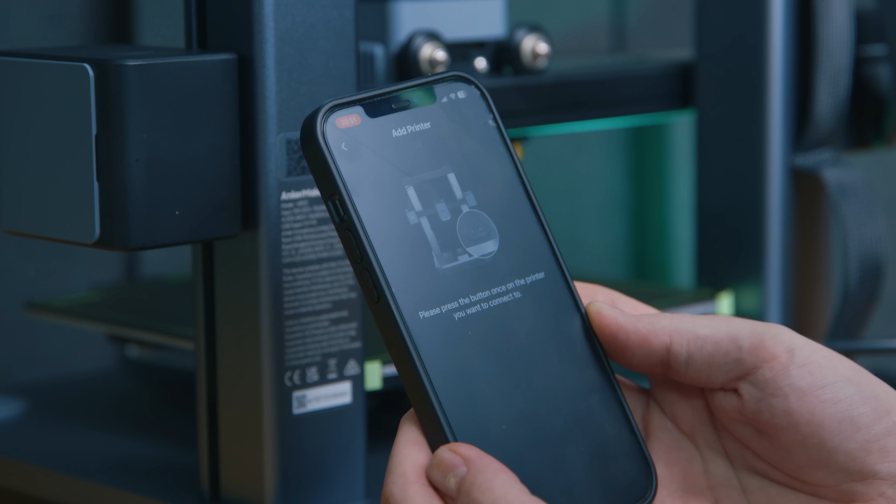This is a neat and tidy application with all the functions and options where you'd intuitively expect them to be. You easily connect your printer to a phone using no more than the QR code on the printer, and once you create an AnkerMake account, this will connect the printer to that account and your local Wi-Fi.

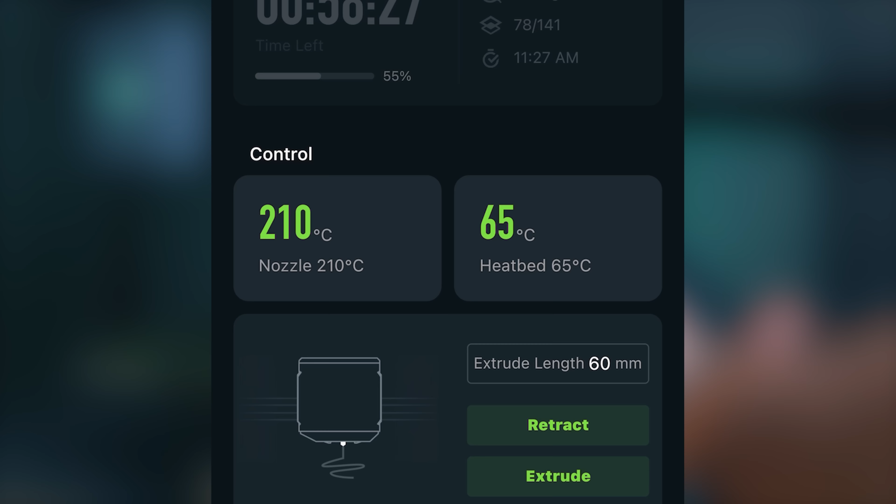All of the controls that were on the screen of the M5 are now in the phone app, and you'll still have full access to all of the functions. It's kind of like the original Google Chromecast approach. You don't need much in the way of external controls when you already have a device in your hand with a screen that can do it already.

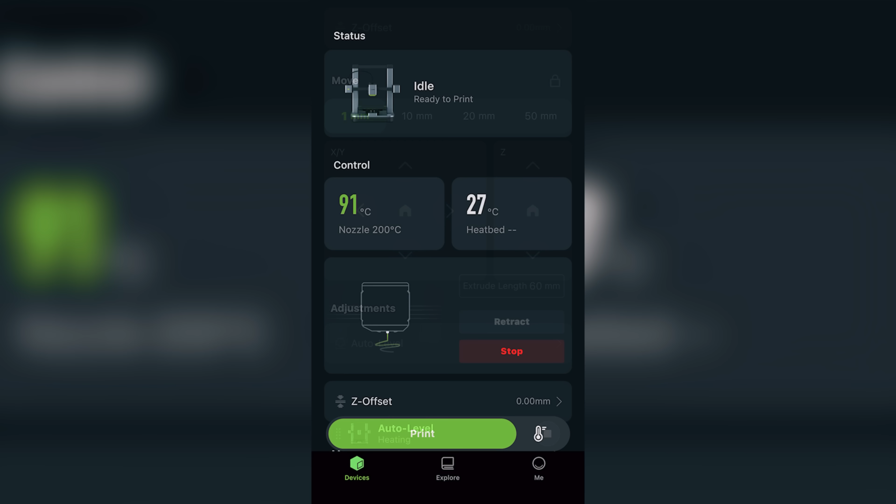All of the functions like bed leveling, moving the plate or the Z-arm are all done in here. Preheating is done here, and there's a selection of prints you can run from here too.

But for proper prints, the real work is done in the desktop app, the AnkerMake Slicer, which is essentially a re-engineered version of Cura. But unlike other OEM branded versions of this application where the style's been changed, this version has been refined to show you only what you need in order to get the printer working.

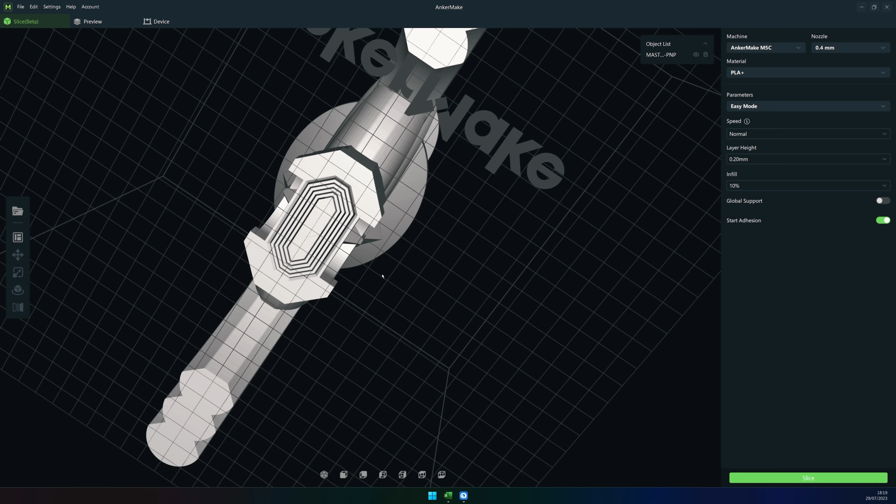As soon as you log in, you'll find your printer is already there along with its settings since you added this to your account in the phone app.

From here, it's just a simple case of dragging a model into the view window, and your settings at the outset are as simple as choosing the material, the speed, the layer height for quality, the infill for support, and whether you'll need to support it or not.

Then just click Slice, Print, choose your printer and wait for it to start. It's all done remotely. And if this is your first print, it will perform a full auto bed level, which will take about 10 minutes, but then it'll just carry on with your print.

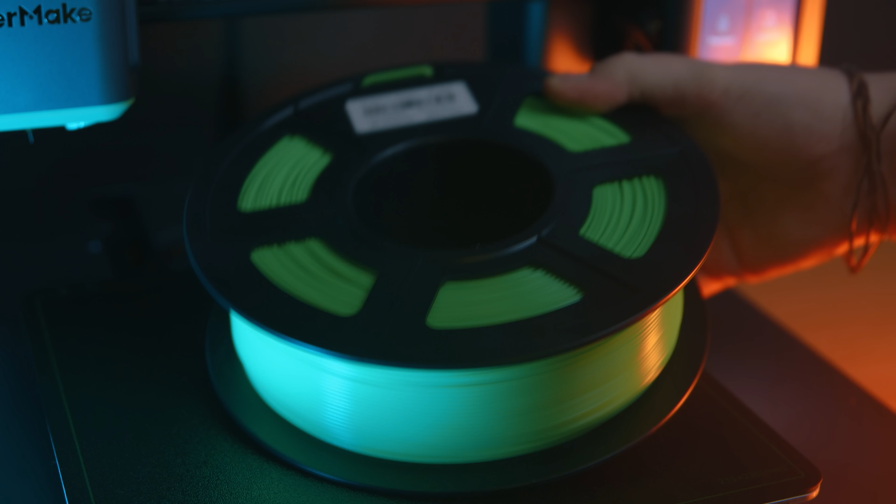And so long as you're using decent quality filament, that's as much as there is to it to getting started 3D printing whatever models you want.

Now the good news is, if you do want to delve in further and refine your printer for better quality, accuracy, or the intricacies of different filament types like silk PLA, you can. Just switch from easy to expert mode and you've got full access to the whole range of Cura settings.

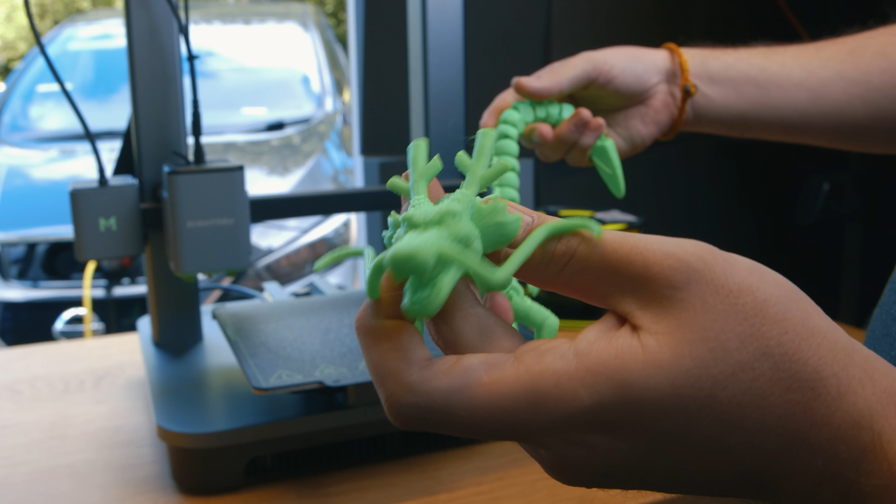And for me, someone who's still an intermediate beginner with FDM printing, this ease of use along with the tidy workflow is something I much prefer over every other printer.

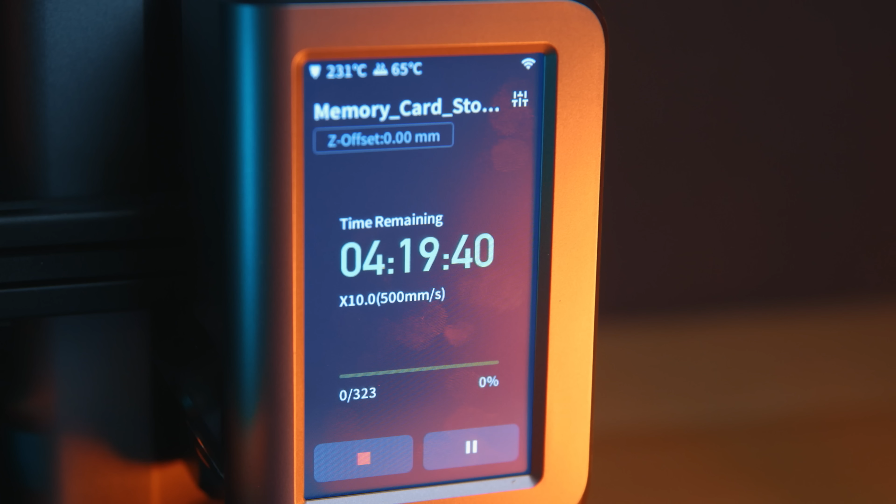Now with the M5C, I do miss that onboard screen giving me a clear countdown of how long I've got left on a print, and I miss the AI camera too. I also kind of miss the extra 15mm on the X and Y build volume.

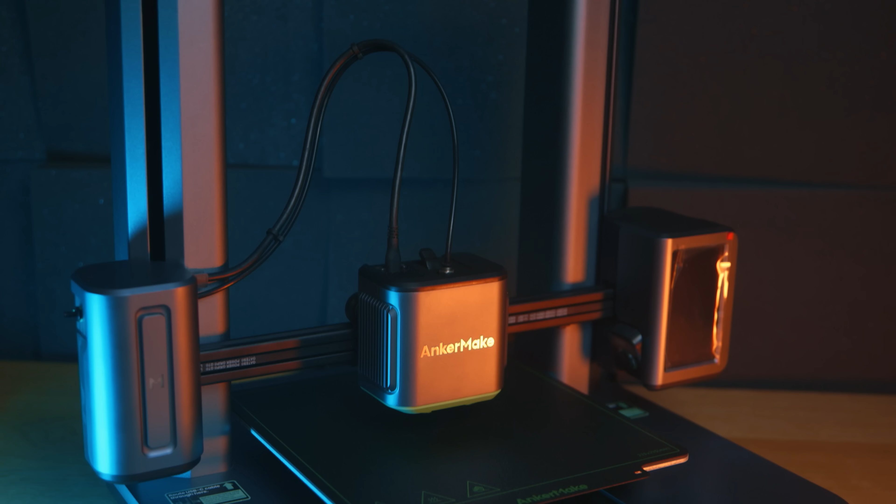But this new printer has some benefits too. The bed belt has now been raised out of the base of the unit where it was recessed on the M5, and I'm not the only person who noticed it was a pain to get bits of loose filament out of that mechanism. And at least for me, I've found prints out of the box are far more accurate too.

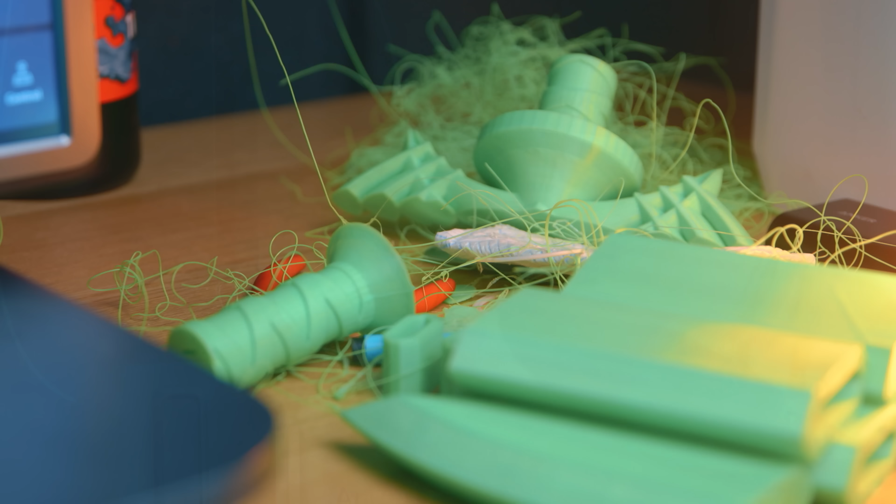I spent ages trying to dial in my retraction settings in order to print a collapsible sword on the M5, and I never managed it. The print would consistently fail because the seams would fuse.

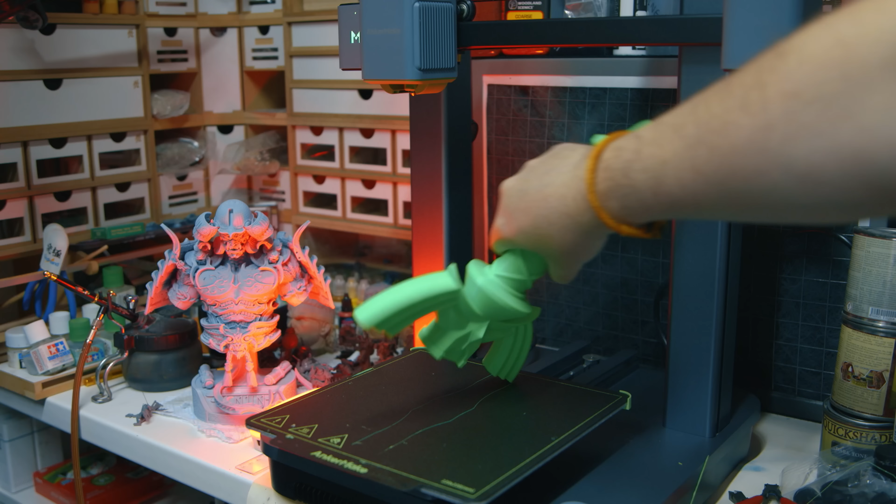But on this printer, using the exact same filament I used before and no changes to the default profile, it printed and it was usable on the first try, so there's probably been some tweak to the hot end too that I'd like to see replicated on the original M5.

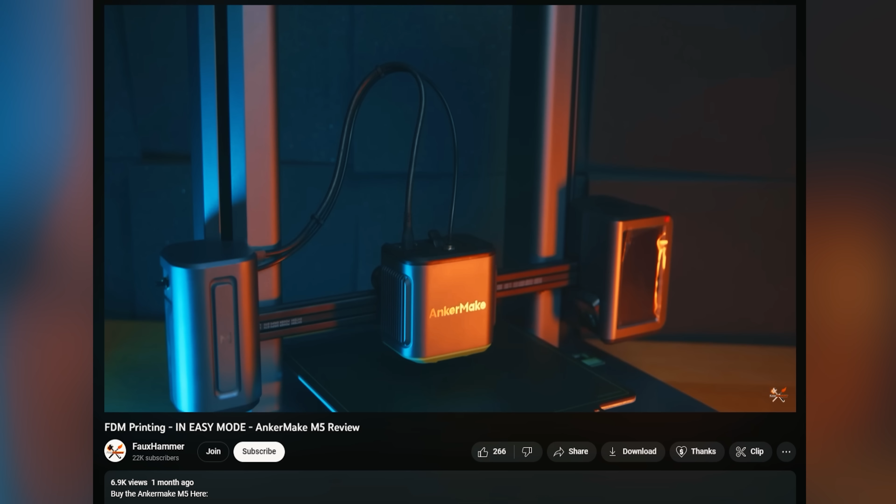But honestly, the main difference on this printer to all others is user experience. A few people saw my last video and believed I was just saying the M5 was worth a premium price just because it's got a big clock on the screen, but that's my bad for not explaining myself right.

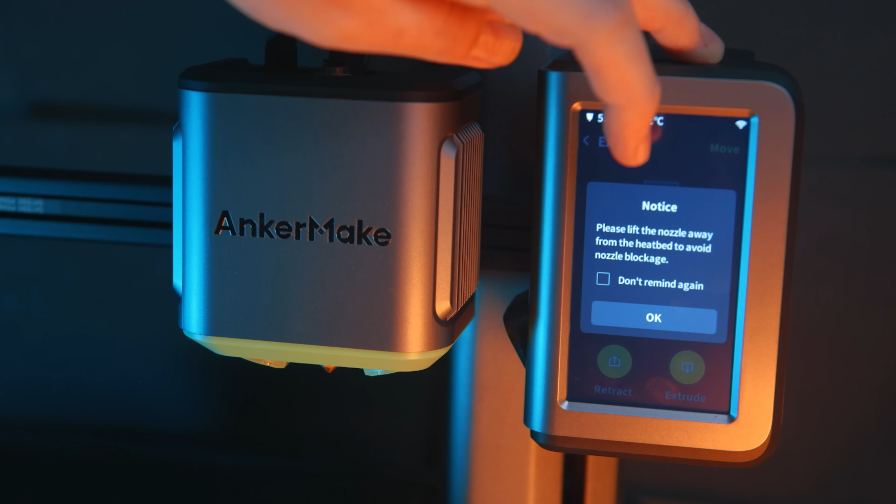It really isn't just because it's got a big clock, it's that clock, like every single other part of the UI, has been carefully thought out to be in the exact right place you'd want it at the exact right time. And that's just one part of a multi-tiered and multi-layered experience that results in saving me so much time in having to even think.

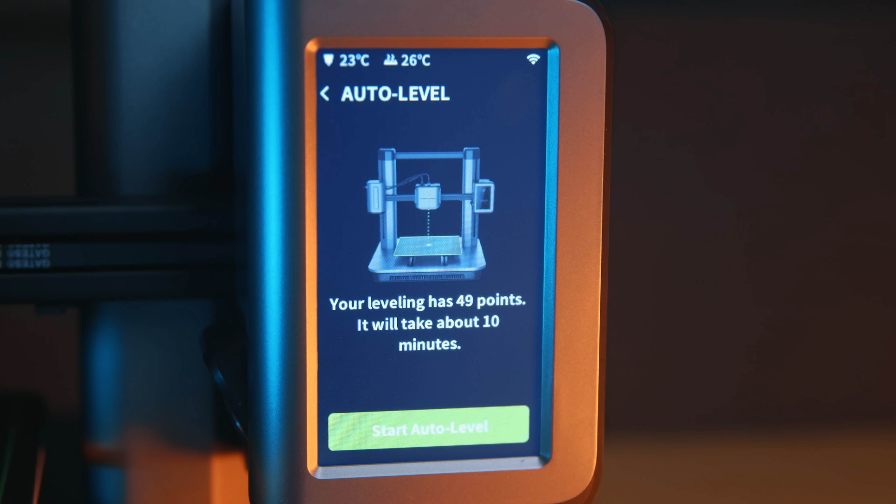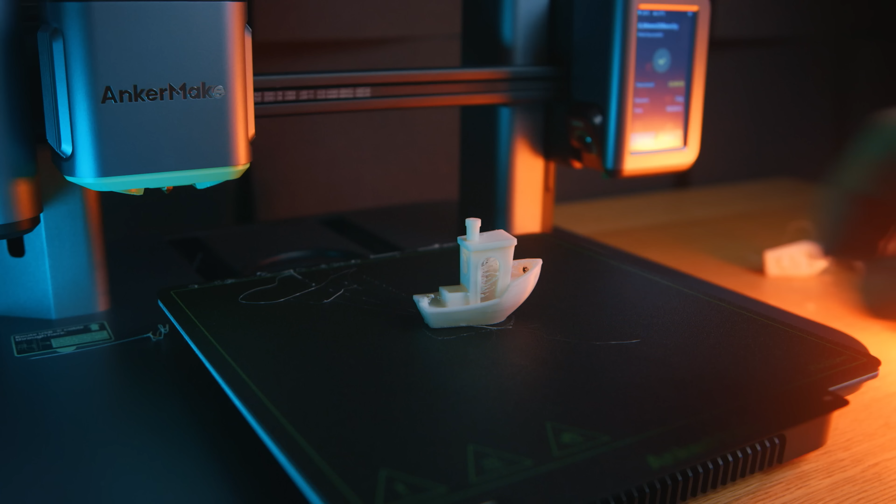It's the persistent and smaller barrier to entry difference that consistently makes me reach for my M5 first whenever I want to print something. But if there's anything I'd like to see change, it's a tiny thing, but I'd like

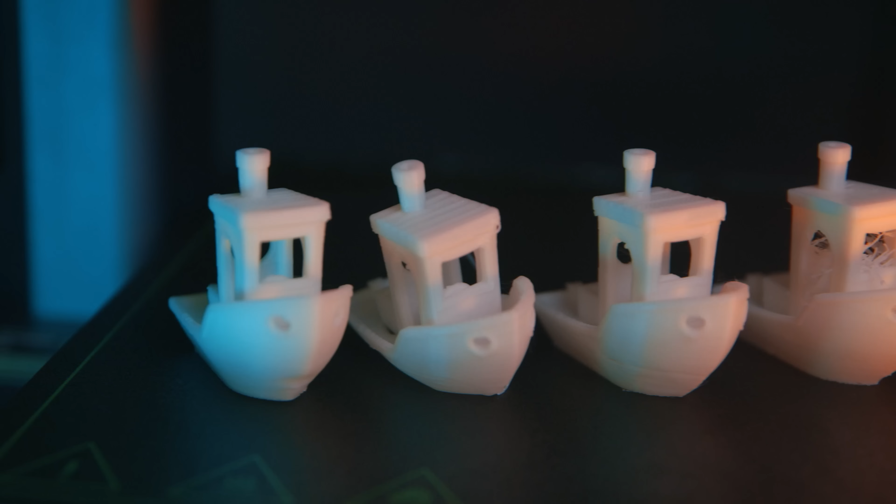AnkerMake to offer an ultra low layer height preset in their options, whatever the minimum step distance is, just for those very few of us who are desperate for that ultra fine level of quality. Other printers have offered as low as 0.06mm, and I doubt it would be hard for AnkerMake to implement this in their minimum step distance for both printers too.

But other than that, honestly, if you're after a printer that is easier to get to grips with than anything else, just so you can make cool stuff, maybe as decorations for your kids or toys to play with, this is the only place I would truly recommend that you start.